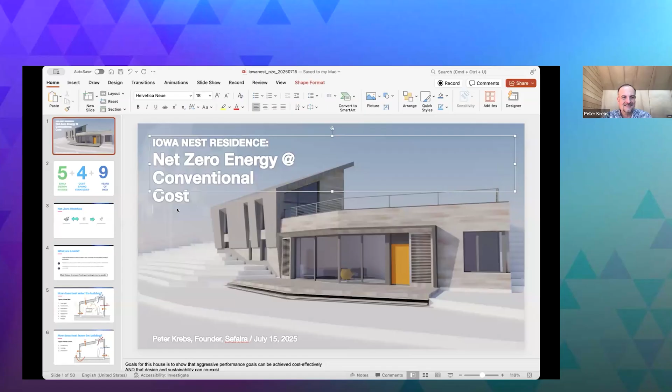Appreciate you joining today. We're going to be covering a project called the Iowa Nest Residence in Iowa. It is a net zero energy build, and the focus is really on the process of delivering net zero energy construction and doing so at conventional cost.

There's, I would say, a misconception that has existed for years about the cost of sustainability and the fact that there's a premium associated with sustainable design. Now, while that may have been true 20 or 25 years ago, modern designs are tending to meet, in some cases even beat, the costs of conventional stick-built construction, yet deliver far more significant and impactful outcomes.

So if we're talking about delivering a building that is climate positive, that generates its own energy, that has a very, very low energy footprint in operation, we're going to cover how we do that. And we're going to cover the methodologies and some of the building physics to get you familiar with the process of delivering net zero energy buildings.

So this project is going to be looking at 5 early design studies, 4 cost-saving strategies, and ultimately a total of 9 years of data. What we're really trying to understand here is, using the tooling and the workflow, the approach for net zero design, since this is something that can be translated not just to residences, but also to commercial buildings, to institutional buildings, and a broad variety of projects worldwide.

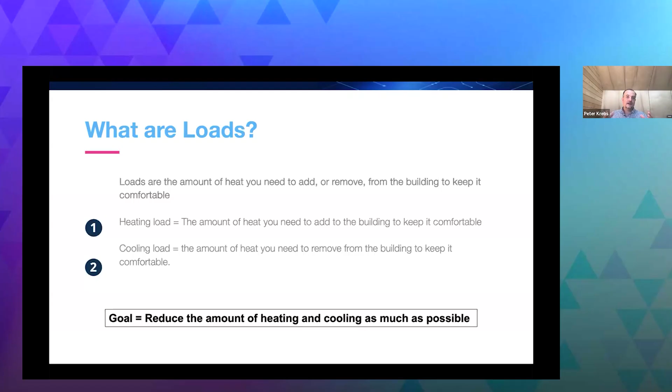So first we start out with heating load. Heating load is the amount of heat we need to put into a space to keep it comfortable in those winter months. And cooling load, obviously the opposite - it's the amount of heat we need to remove or reject from the building, also to keep it comfortable. But if we set a goal of reducing the total amount of heating and cooling as much as possible, we can actually optimize for the smallest possible load footprint in that project.

So to talk about these heat gains and losses, we actually need to come up with some definitions. I promise I won't go more detailed than this, but we need to start by thinking about how heat enters a building.

So there are a number of different means by which this happens today. You've got solar gain, that's sun coming into the building and warming the space. You've got conduction, that's sun affecting the skin, the envelope of the building, and heating that up. We've got infiltration.

That's the warmth of the air that's coming into the building, infiltrating into the interior air. We've got ventilation, so those are actual heats generated in the process of providing fresh air and cooling into the building. Some of that heat is going to come in as well.

Then we look at appliances. If you look around the room you're in right now, I guarantee appliances or equipment, whether a laptop computer, a microwave, or a refrigerator, are all devices producing heat. Often, even if they're low energy, they're producing heat over a very long duration. Your refrigerator might be running 24/7, so if you can reduce the load associated with that, you're also reducing your cost to operate it and the amount of heat you then need to do something with in that space.

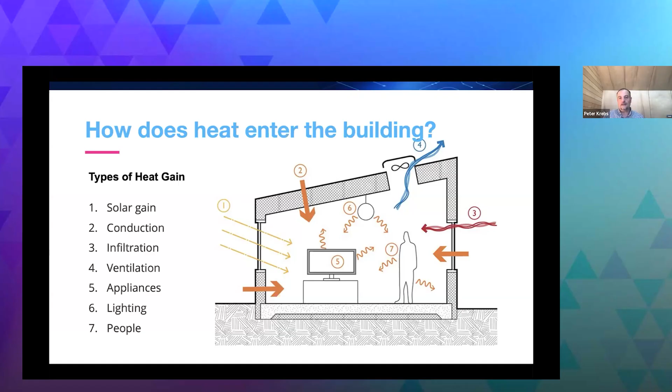The contrary to this, of course, would be how does heat leave the building? When we talk about heat leaving the building, those losses tend to be through conduction, again through the envelope itself. They can be leakage related, the warm air, if you want to think of it that way, exiting the building through gaps in your windows and bucks.

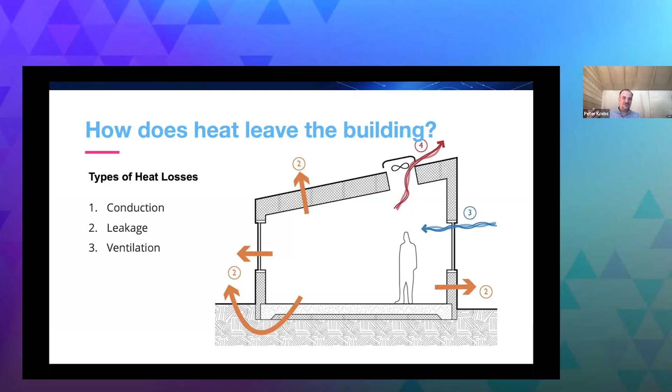It could be warm air leaving through the base of your door. There are so many porous areas within a building that reducing the overall amount of infiltration and leakage can be a really meaningful step to reducing the total loads you need to design around. Last piece, of course, is ventilation itself. Anytime you bring air into a space, you may need to condition it so you get the benefit of the fresh air, the fresh oxygen, but you're still doing something with the heat or cool that it had.

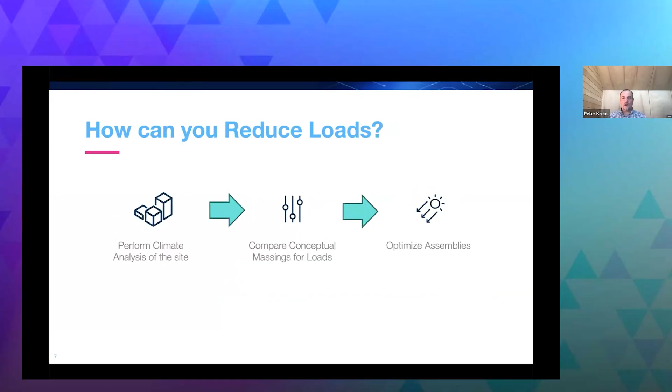So that gives you an idea of loads. How do you go about this, though? What we've created within the Sefaira platform and the SketchUp platform is really a series of tools that starts with the performance of climate analysis, even before you have a massing, then moves on to comparing conceptual design massings, to optimize them for loads, and finally to look at groups of these different strategies and optimize the sum of those, or the assemblies themselves.

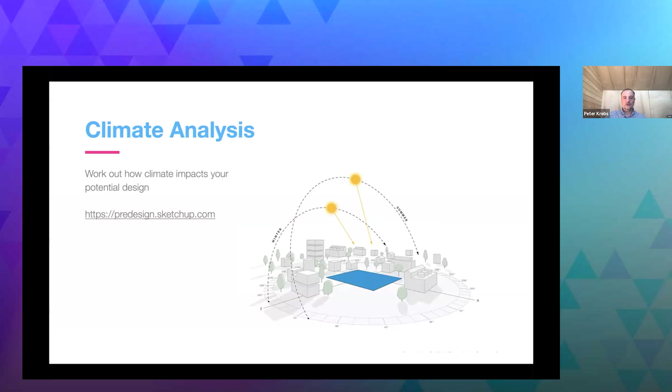So very briefly, for those of you that have SketchUp today, SketchUp includes something called pre-design. Pre-design allows you to test out how climate will impact your potential design. As you look at a building, even before you have a geometry in place, you can start to test, for example, what the effect will be of orienting that building, or what potential strategies to consider given the climate where you will be building.

Is this a climate that is going to promote natural ventilation, or maybe natural ventilation isn't an option there? Is this a climate where shading could provide a meaningful benefit to the occupants? Is this a place where you could have more of an indoor-outdoor space, or where you're constantly conditioning the space to make it habitable and comfortable?

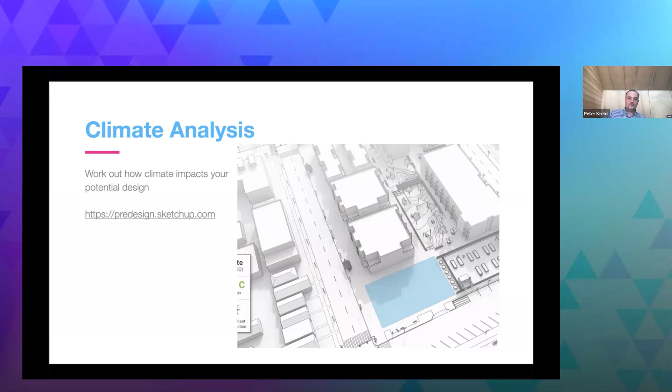Another option and question we are often asked is how do you apply shading strategies to reduce the amount of heat coming into a building? You can test different facade shading strategies, whether overhangs or brise soleil or other design options, to protect your space from light coming in and therefore gaining heat in the process. That's part of pre-design, which is part of every SketchUp subscription.

The second half of this is Sefaira.

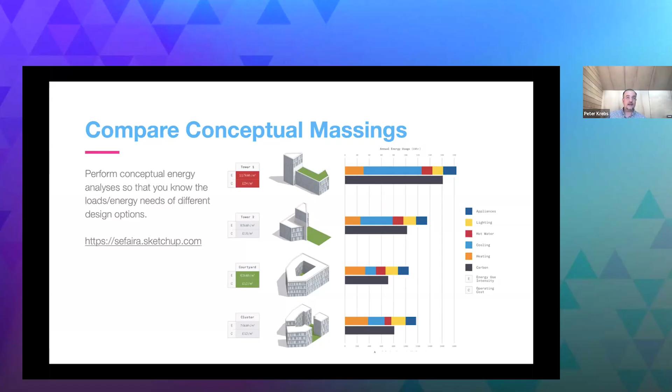Sefaira is a conceptual energy modeling tool and daylight modeling tool that lets you test out different massings. It lets you try different options and compare them side by side, so we can see how a building would perform under one specific set of conditions, with a certain loading, a certain number of people, a certain watts per square foot of lighting or equipment density, and compare that with another building of a different shape or morphology. They may have exactly the same square footage overall, but dramatically different performance. Testing those options against one another quickly and iteratively is really the heart of early stage concept design, and that's how our customers get the best possible results.

If you go beyond energy, you can also compare conceptual massings in daylight. You could set energy aside as a metric and ask, what is the best possible design for our window-to-wall ratios, giving us the option to look at different window types or shading options, and in doing so reduce the amount of artificial light we need while maximizing the natural light coming into the space.

The office I'm in right now has no artificial light at all—it's entirely naturally daylit, which makes it a very comfortable space to be in. We find when talking to end users that that's the kind of environment they're trying to replicate for their customers: as much natural light as possible without excessive glare.

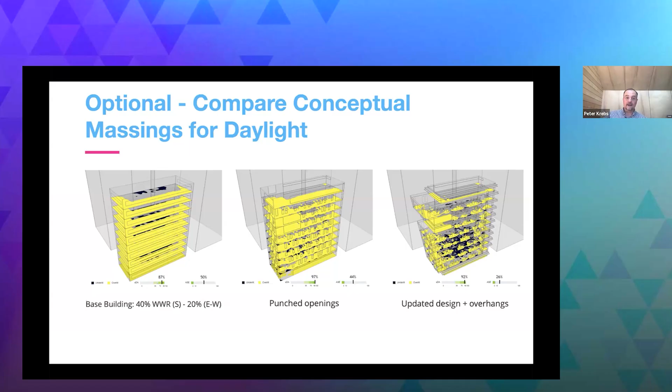As you get further in the design process, you can start to optimize assemblies. Assemblies, in our world, are structures or groups of different systems as well as efficiency measures—types of glazing, types of insulation, a certain amount of infiltration, for example—that help us understand what the overall package looks like from a cooling energy budget, a heating energy budget, and an EUI, or energy use intensity, a metric that gives us a direction or trajectory for how much energy we'll need to keep that space within the parameters we set.

We can compare things like energy costs—annual energy cost is a common one—and try out different options or packages of options relative to a baseline, typically relative to code baseline. So we can see how many percentage points better you are than code baseline, how much potential savings you might have. But the fundamental idea is to do things quickly and iteratively: try different options out, don't prune those solutions too soon. Try things out, see what the data tells you, and then pivot and make adjustments to the overall design to get your EUI down and your annual energy cost down as well.

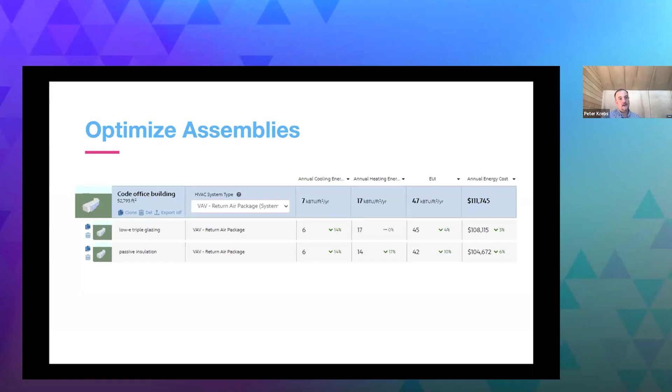So if we think about why, and leading with why, the reason we do it in this order is that if we can get to lower loads, that allows us to meet the heating and cooling requirement within the building with smaller systems. Smaller systems also happen to cost less, and they're often simpler to maintain and run. So there are benefits that come along with having lower loads downstream of the actual load itself.

Smaller systems also require less energy, and when we have less energy demand, that means we're projecting a lower operational cost and operational carbon over the course of the lifetime of that building. Don't think about a building from an annual perspective—think about it for its lifespan, and whether or not it might be reused for a different purpose in the future.

And if you follow all those pieces, then the renewable component—the way we generate the energy to power that building—will be as efficient as possible, because you'll need the smallest footprint of, for example, solar panels or wind to deliver the energy needed to drive the building. That gives you the lay of the land, the approach that's taken. We've worked with thousands of different sustainable designers across the world, and the consistent message we get is that if you follow this approach, this formula, this direction, that strategy will get you to a low energy or zero energy building.

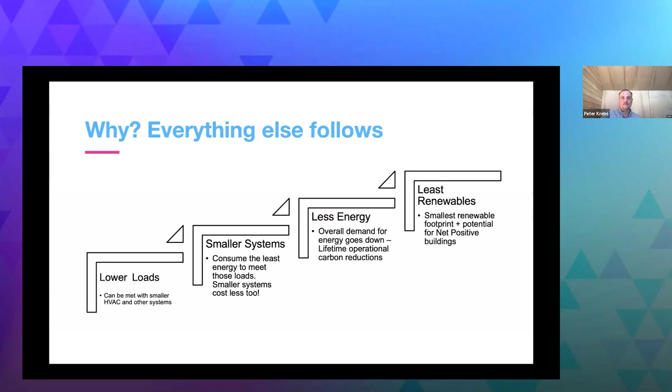What better way to look at that than to look at this specific project? This is a project called the Iowa Nest. And just to situate yourself, this is a very rural area of Iowa.

This actually used to be a quarry. Since it was abandoned in the 1980s, this has become a very mixed use area. So you've got pastures, woodlands, set-asides, and it's a very beautiful area.

When the client came to speak with us about how to deliver this design, the objectives were manifold. First, deliver a building that could outlast them, ideally lasting over 100 years. Second, deliver a building that could be as passive as possible, using the benefits of the location to maximize the benefit of shade.

To use thermal mass to benefit, and ideally to leave the smallest possible environmental footprint upon completion. Then the last piece was something nuanced: how do you deliver a building with the lowest overall ongoing maintenance? So as the building is lived in, how can you make it as easy as possible to maintain, run, and operate, with as few things that could possibly break over time?

So this was brought to one of our customers, Sterner Design, and Sterner Design started to use Sefaira for the purpose of doing this analysis. One of the first questions that came out is, in this kind of residential structure, roughly 2,000 square feet, what strategies would make the most impact to the building itself?

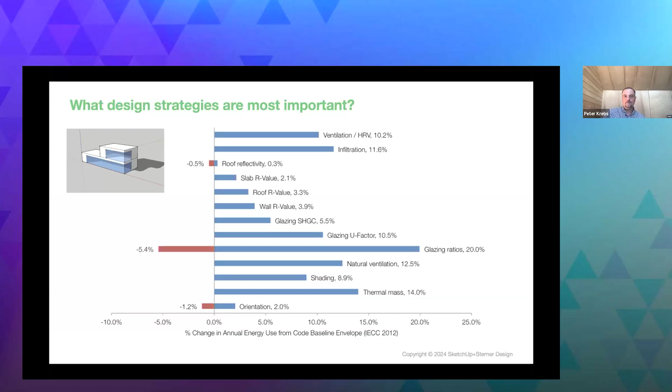Now, if you layer on that strategy whether it's inexpensive, one dollar sign, or very expensive, three dollar signs, you can start to ask which design strategies are most cost effective. In this case, glazing ratios are a low-cost strategy with a big impact, so the owners decided that would be one of the strategies to go with.

Same thing with natural ventilation, it's an impactful strategy delivered at relatively low cost. Other strategies considered in this category were things like thermal mass and reducing infiltration. These are strategies that make a big impact at a low cost before we get too far down the rabbit hole of the design.

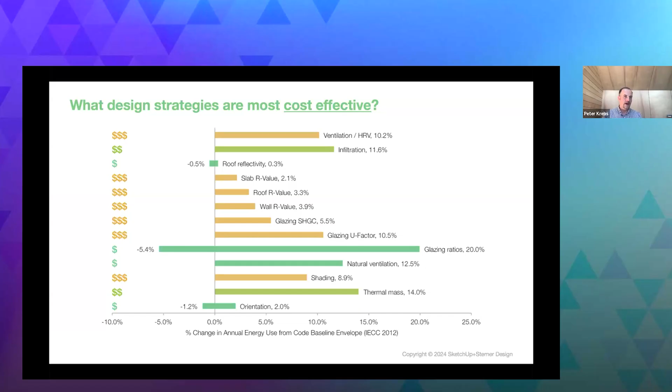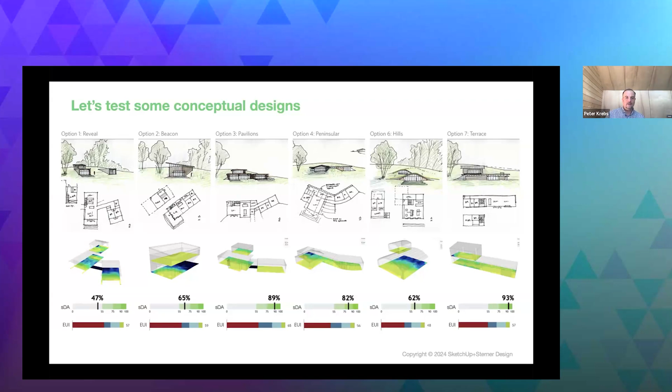If you're curious, the size of the bar underneath, for example the red bar, is the amount of heating required to keep that space comfortable. The blue bar is cooling, the green bar is domestic hot water, and the light blue bar is appliances, just to give you a relative performance of these options.

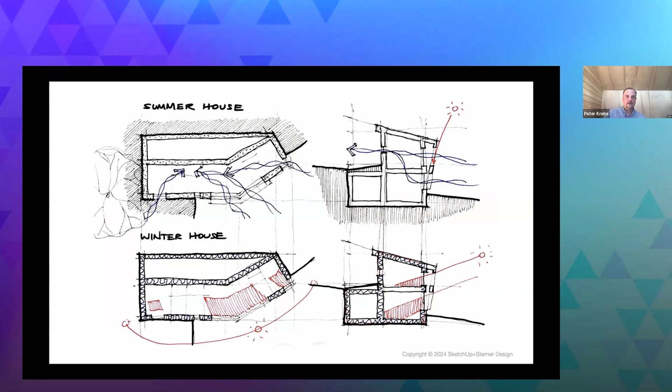So one option that stood out, and we saw that in the previous slide, was looking at natural ventilation. How can natural ventilation be used in the design to promote a good cross breeze in the space and potentially avoid mechanical air conditioning? Separately, since there are long winter months in Iowa, what strategies can you use to consume as much of that light that comes in to warm the space up? And during summer months, design a shading system to reduce the amount of heat that comes into the space. So these are the questions that were asked and that we wanted to test.

To answer that question, we really need to think about the glass not so much as being something that's just visually appealing, but actually, is it promoting or is it productive towards our goal?

So this is a box model of one of the designs, and it gives you an idea of how the building performs in heating season, that's winter, and on the right-hand side, in cooling season, that's summer. The objective here is, do we get good light to come in to warm the space up when we need it most, which is in the heating season? And the answer is yes. You see lots of bright patches show up across the space, upstairs and downstairs, in the heating season.

Meanwhile, in the cooling season, in summer months, you actually want to have much more diffuse light. You don't want direct light to come in because that direct light is heating your space when you don't want that. So coming up with a shading system to mitigate those areas that you don't want to have warmed is a really interesting part and something you can easily test within Sefaira.

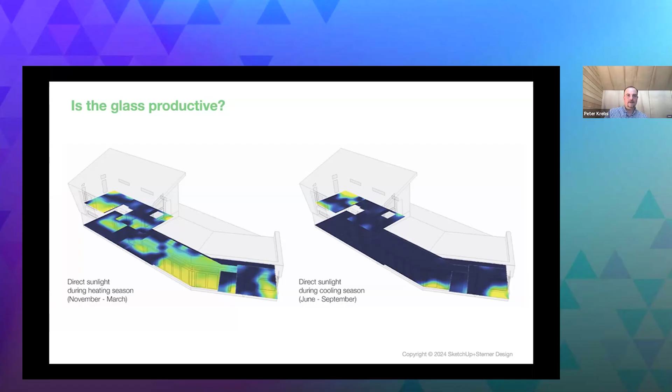Ultimately, for this particular design, this gives you a breakdown of how the shell was designed to maximize shading in an intentional format. What do I mean by that? The intentionality here was using this roof design to shade the upper floors during the summer months, where we really didn't want to have additional light come in to heat the space.

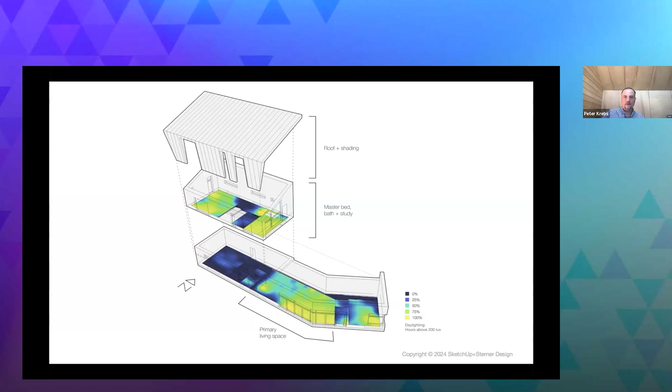And to provide an additional brise soleil here on the bottom and a shade that reduced the amount of light that came into that lower living room area and the kitchen and dining areas. So you can test these things out, and you can test them quickly if you allow the software to test these different attributes.

So one of the best ways of communicating this to the design team is by looking at a waterfall chart. This is a popular chart from many of our customers, looking at the reductions over time associated with each strategy or each group of different design interventions. The left side of this graph shows the code baseline. This is what a standard building would look like, a standard residential building, I should be specific. Then next to it, you can see each individual intervention.

For example, applying a high level of insulation, in this case roof, wall, and floor insulation, had an impact of reducing our total energy use by 20%. That's a really meaningful thing. If you did nothing else, that is a great passive design measure.

Being intentional about infiltration, and this project was designed around the insulated concrete form approach, or ICF approach, that reduces that annual energy use by another 21%. And then being intentional about where and what kind of glazing is used, and the use of thermal mass, i.e. concrete in this space, that gets you down between those first four strategies to over 50%.

So again, with nothing else, those first passive design measures are reducing the amount of overall energy use by over 50% compared to baseline. At that point, all the actual efficiency strategies, so a lower lighting budget because you can use LED versus incandescent, for example, or more efficient domestic hot water fixtures, those are strategies that have a much smaller overall efficiency, but you're doing it on a much lower set of loads already. So the impact is smaller.

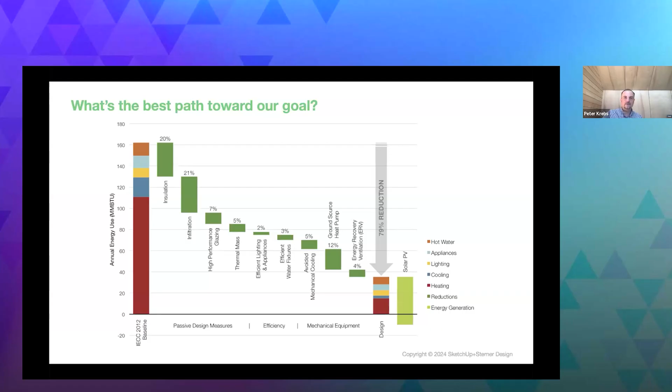So, as I said earlier, there are a couple lessons that were learned, and I want to share some of these with you. The first design, one of the earliest designs in the SketchUp model shown on top, was a comparatively more complex design.

One of the things we found is that in specifying the insulating concrete forms, corners matter. The more corners you have, the more complex the system is, and it results in higher cost. The design on the left is over twice the budget that was initially presumed.

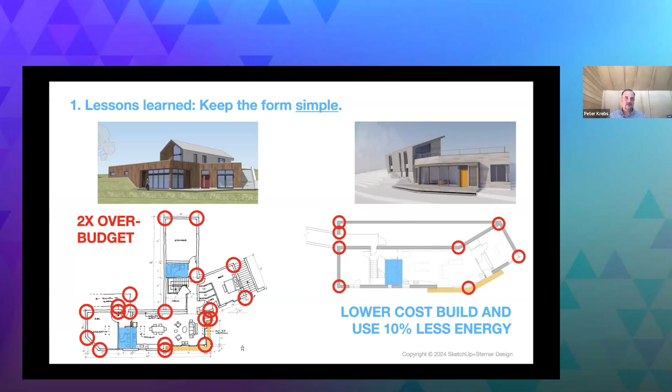Meanwhile, the design on the right is simpler, which means simpler to build, but also simpler and cheaper to operate. This is a lower cost build, and also uses 10% less energy than the footprint shown on the left. So this is a clear case of testing different geometries and massings, and seeing what their operational cost impacts look like.

The second lesson: now that you have a simple geometry, keep the envelope simple. The solution devised is shown here in a cross-section, a picture from LayOut, the design documentation tool that SketchUp provides. This gives you a really clear view of how everything is composed within the building.

You can see the walls and floors made out of concrete, and the roof made out of concrete as well. You can also see the insulating concrete forms, shown as that hashed color, and the LiteDeck. The LiteDeck is the roof supporting system that has insulation in it and acts as structural support for the concrete while it's curing.

This simple envelope meant it was simpler to deliver, and simplicity means cost savings.

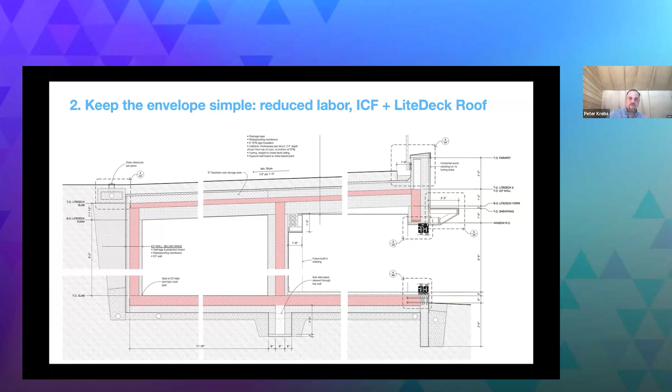By looking at the mechanical design and testing this within Sefaira, we determined that a ground source heat pump would be overkill for the project. It would cost too much overall, and would also deliver too much heat at times when it wasn't needed. This building doesn't require a lot of heat—it's so well insulated and has such low infiltration.

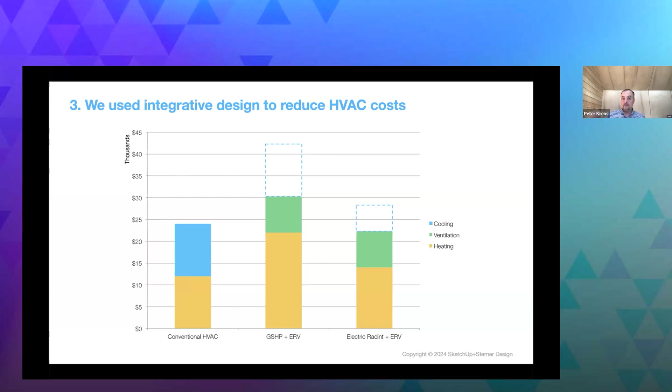So the actual delivery, when all was said and done, was an electric radiant floor system, which can be toggled on demand on a per-room basis if needed by the client, along with an ERV. The energy recovery ventilator is there primarily to bring in fresh air and remove deoxygenated air.

Another area is to focus on being really judicious with expensive finishes. If you look at where most dollars go in the construction process—and we'll look at a cost breakdown for this house in a moment—the finishes, whether in bathrooms, floors, or kitchens, tend to be what really drives up cost.

So if you can reduce the amount of space you need for a bathroom, you can still have a high quality finish, but you're not putting as much of it on. Less finishes by square foot means less cost.

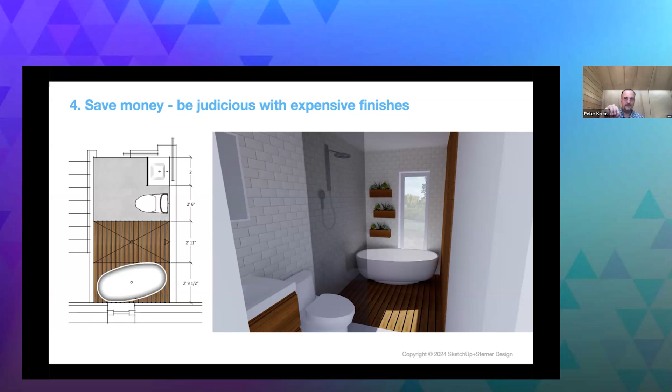I've seen a picture recently of this same space, the actual reality compared to the rendering, and it looks exactly like it, with the wood floor there on the bottom underneath the tub. So even the finishes are making sure that dollar you spend is going the extra mile.

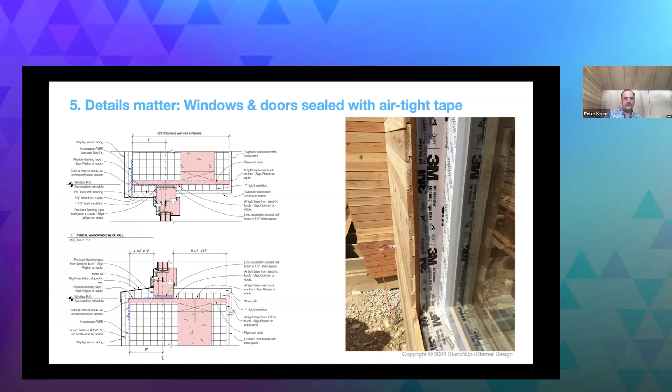So this was something that could actually be built following strict instructions, focusing on things where they really needed to be—details around the ceiling, the taping of individual joints, how things should be handled from a waterproofing perspective as well as air infiltration. All those details could be easily analyzed and put into place following the instructions made from SketchUp's layout application.

Going a bit further, this shows some detail of the air sealing. We knew infiltration would be a really big part of this building's performance, so finding every possible way to identify where air could come out or go in, and reducing that where it was not wanted, is really critical to performance.

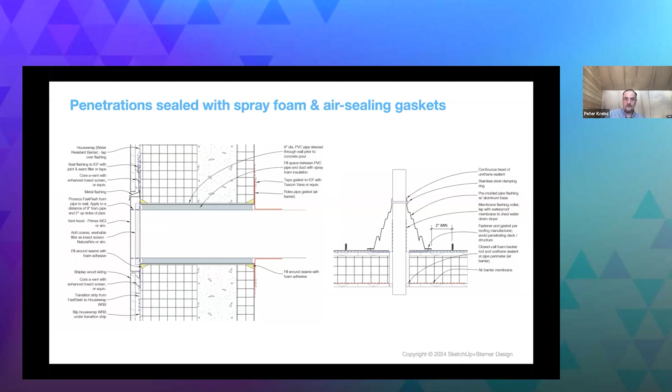In practice, you don't just have an infiltration value or a leakage—you need to define a target and test it using a blower door test. Blower door tests have been around for a couple decades, but it's really cool to see one in progress. Looking at the overall area of the envelope, following passive house principles, we developed a goal of 530 CFM at 50 pascals.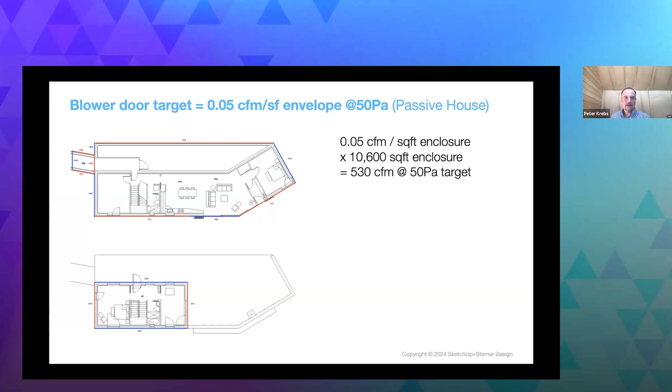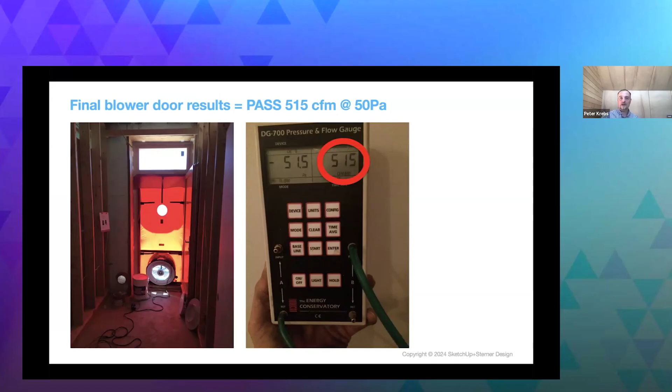If you look at the final blower door results, after depressurizing the house and spending a lot of time going through every construction detail from a ceiling and air sealing perspective, this is exactly what was delivered. We beat the goal and passed at 515, which is under the 530 CFM goal.

There are two other parts of the performance data stream: understanding and monitoring on a continuous basis the performance of the building itself. What I mean is, what are the ways we can look at the building over time and understand the impact of outside temperature and humidity on how it feels inside?

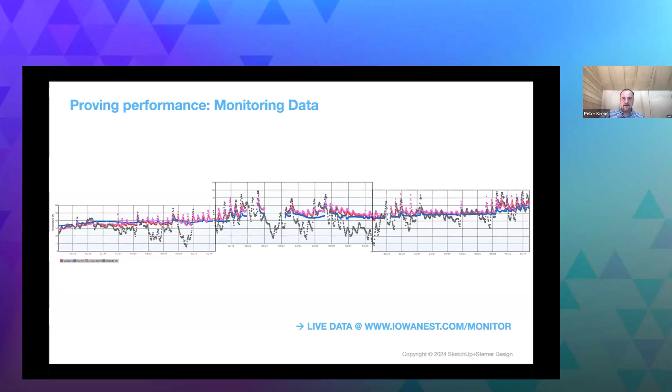Sure, you could talk to the occupants and get a feeling for that, but one unique part here is we developed a monitoring system specific to this house, measuring in three different parts of the building, and comparing that to the local airport, about 3 or 4 miles away—getting external validated data as well as internally measured data to compare. It's almost 9 years of operation now.

Just to give you an idea, this is a view of the house unoccupied, from one of the earlier years. In the brutally cold winter in the Midwest, you may have -20 degree temperatures outside, but the house itself, without heat, is able to maintain a steady state of 50 degrees. When it's sunny—each of these individual peaks in pink—those temperatures can rise to 55 or 60 degrees, and again, that's unoccupied.

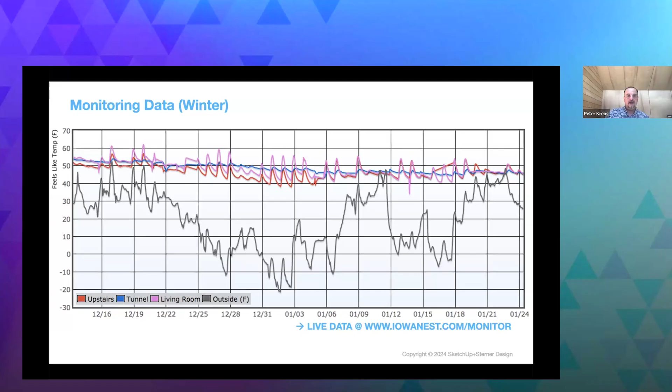Since then, when you add appliance loads and human loads from occupants, that temperature level goes up by about 8 to 10 degrees. So it's absolutely possible to have a building continuously operating without mechanical heating in the wintertime. The maximum delta we've ever seen in this house exceeded 70 degrees—the highest was a delta of almost 90 degrees Fahrenheit, the temperature difference between inside and outside, just to show how extreme it can be.

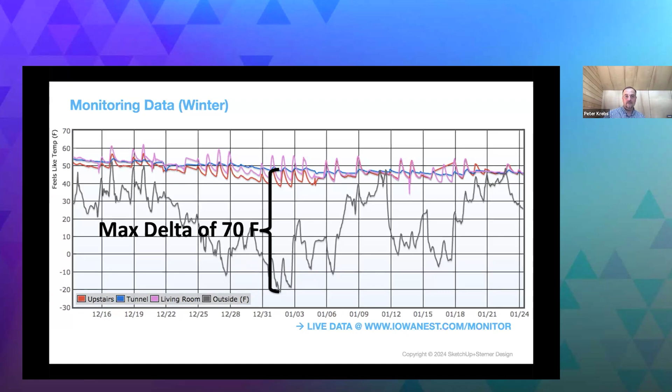The flip side of this is not just the winter, but understanding how the building operates in summer. This is a set of summertime data. You can see the gray curves showing the daily peaks—these are dry bulb temperatures, not feels-like temperatures. So the dry bulb temperatures might go into the 90s or even peak above 100 degrees, but within the space there's only a long-term trend that's eking upwards slowly but surely.

And that's the tunnel, which is an untemperature-controlled area. Below that, the living room and upstairs give metrics of downstairs versus upstairs within a very tight band, between 73 and maybe 77 degrees Fahrenheit. So it's particularly comfortable. You can see the impact of the outside sun, and a shift associated with the thermal mass heating up and then releasing its heat into the space. Overall, a very nicely temperature-controlled space, which has no active air conditioning.

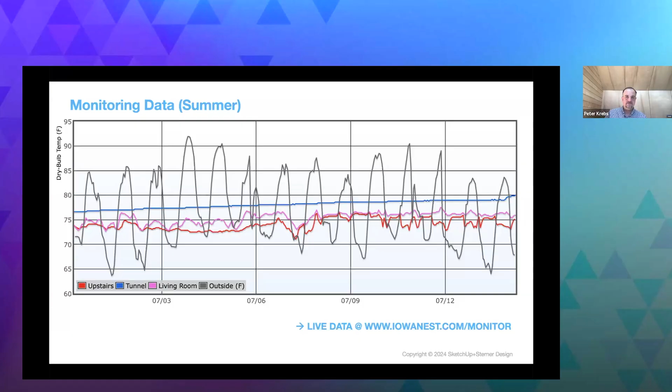Now let's look at cost. Many people have asked me to drill in and help them understand how you can deliver a building that is this performant. Surely it has to be higher cost than, let's say, traditional stick-built construction. And the answer is no, it's not.

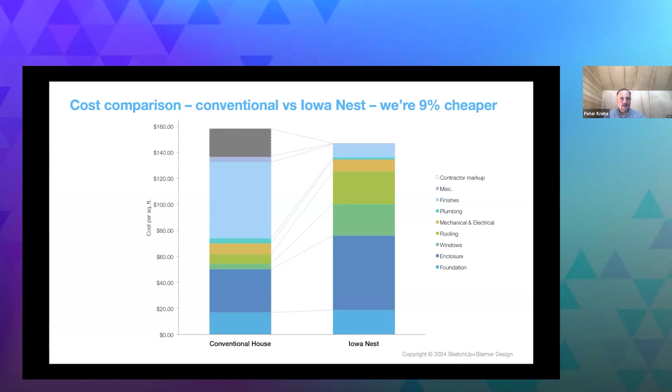It's about 9% cheaper. In this case, the building happened to be self-performed by the owners, so some of that contractor markup goes away. But even with that in mind, look at the areas we spoke about before with finishes in particular, where what normally would be nearly half the budget of the building scales down to less than 10% of the build cost.

Things like the enclosure become a larger portion. This is an underground house, so we're using the actual benefit of the soil to keep the house core temperature low. That also has a certain amount of enclosure cost to it, especially because the house is built out of concrete as opposed to stick-built wood construction. Foundation is marginally higher, again because it's an underground house, but the big components in terms of cost savings are on the finish side and also the mechanical and plumbing side.

A little bit more about that. The total amount of piping in this entire project, the total run length of all pipes actively bringing water into the space, is less than 50 feet, 16 meters. How is that achieved? The two bathrooms in the space are right next to the mechanical room itself. So when hot water is produced in a domestic hot water system, which is a point-of-use electric system, it's generated on demand and has a very low distance to travel to be used in, for example, a sink, shower head, or bath. So there's not a lot of heat sitting in the house waiting to radiate into the space.

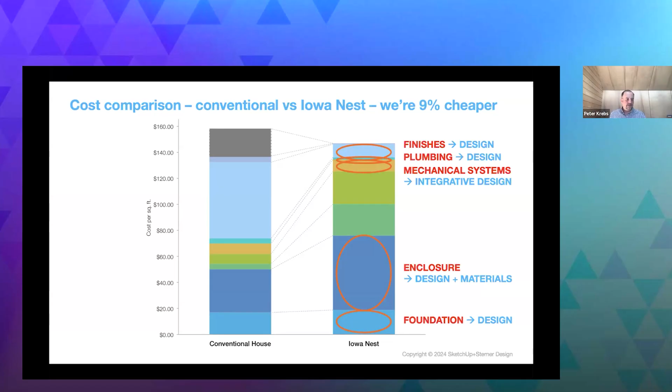It's produced and then used, with a very short time difference between the two. Even then, it's on demand, so there's no ongoing heating or cooling of the water at the time it's not in use.

One of the things you walk away with as you're looking at the overall building's performance is that there are very, very few ongoing loads. In fact, the overall cost of operating the building itself is less than $30 per year. So there's a very low cost associated with actually operating the building, specifically due to a low amount of these perpetual loads.

The refrigerator, for example, consumes 28 watts. You can click on the refrigerator button and see exactly when the condenser's on, and when it cycles back off. That's a load that continues throughout the entire year. So the eGauge is a great way to look at this building over the course of a broad period of time, both at the micro level, showing the last couple of minutes, as well as the macro level, showing the last year's worth of data to understand how each circuit operates.